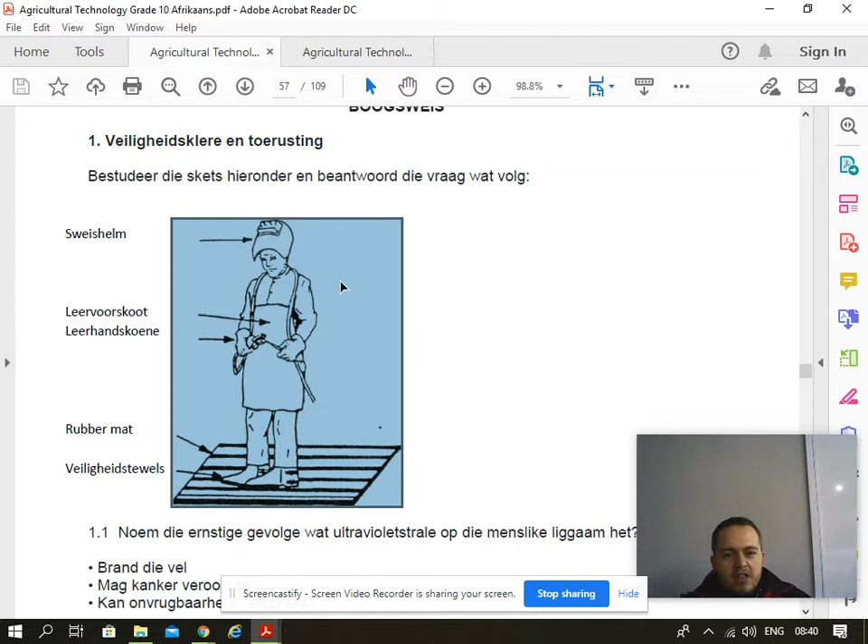It's leather stuff. Where did you buy that stuff? At Afrox. By Afrox, ja. In Stikland, you can also go and look. You can also look in Paarl if you want to go there. There's also one in Blackheath. Ja, jy kan daar gaan kyk ook.

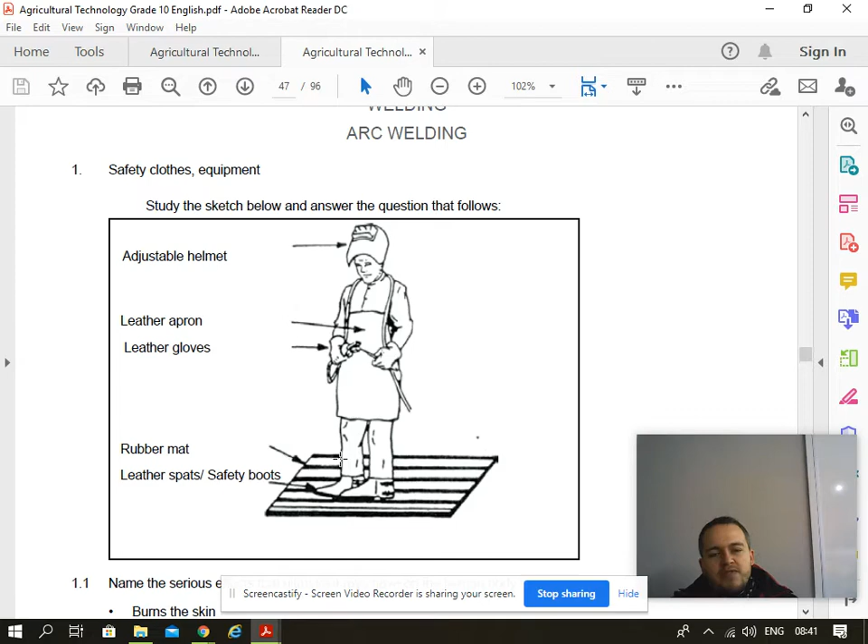So when we do a safety test or a safety exam, usually we ask you the sketch. We ask you what you wear. So you have to have an adjustable helmet, a leather apron, leather gloves, rubber mat, and leather spats or safety boots. Name the serious effects of ultraviolet rays to the human body: it can burn your skin, it might cause cancer, and it can cause sterility.

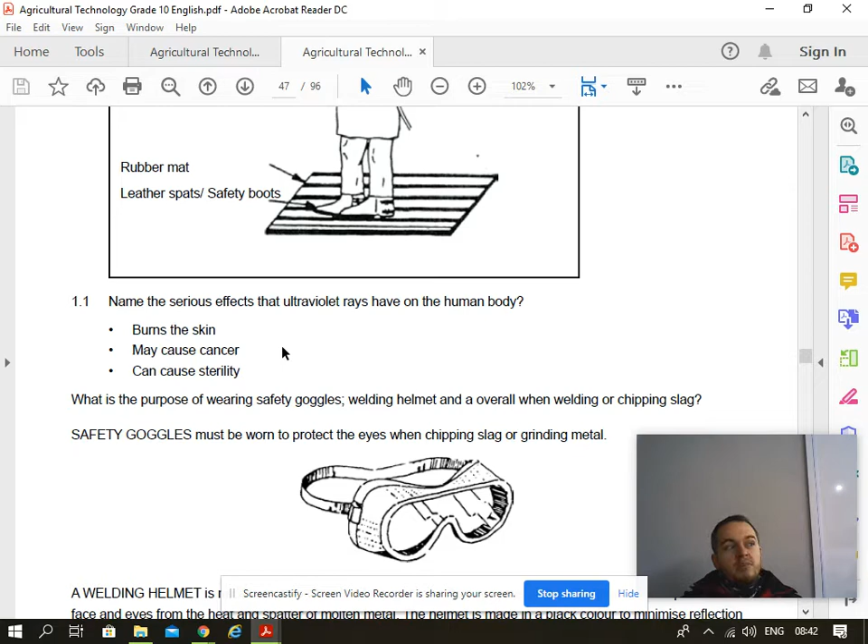That can burn you if you are constantly welding. So please don't go and tack and think you're gonna burn immediately, it doesn't work like that. If you are constantly welding for an hour, two hours, three hours, yes, then the burn will be bad. Does this include if somebody's welding next to you? Only if you're standing close to them, yeah, not if you're standing far enough. This is for direct contact.

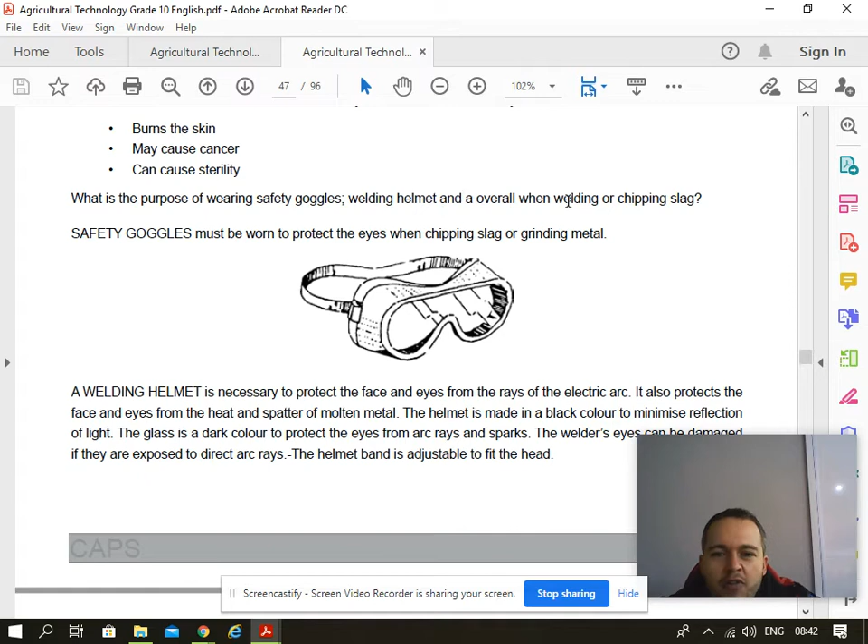What is the purpose of wearing safety goggles, welding helmets, and the overall while welding or chipping slag? Safety goggles must be worn to protect eyes when chipping slag or grinding metal. A welding helmet is necessary to protect the face and eyes from the rays of the electric arc. It also protects the face and eyes from the heat and spatter of molten metal. The helmet is made in a black color to minimize reflection of light.

The glass is a dark color to protect the eyes from the arc rays and sparks. The welder's eyes can be damaged if exposed to direct arc rays. The helmet band is adjustable to fit the head. A long-sleeved overall made of tough material must be worn to protect you from hot metal and sparks while welding. Safety precautions we're going to go to later.

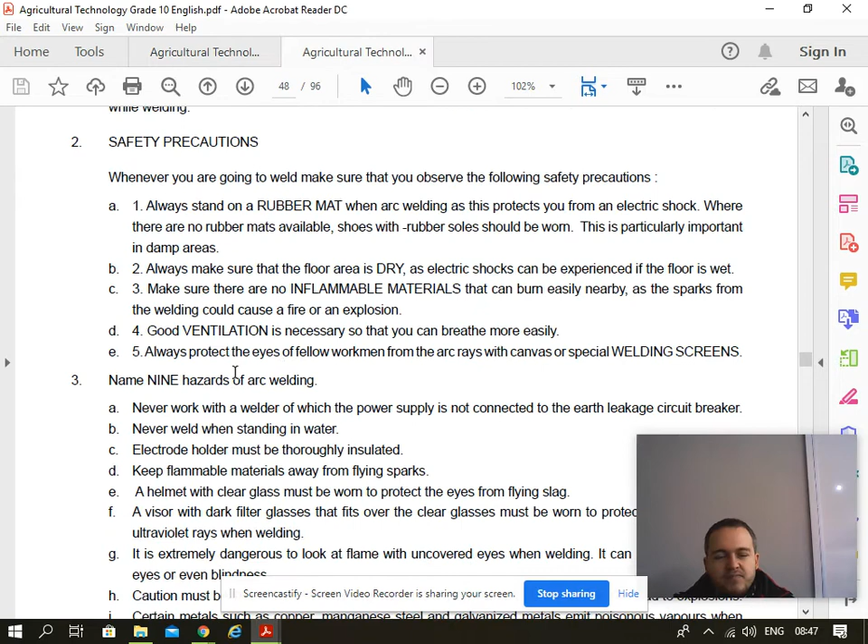Safety precautions. When we weld, we must look at the following. Always stand on a rubber mat when arc welding, or wear rubber-soled shoes. Always make sure that the floor is dry. Make sure that inflammable materials that can burn easily are not nearby. Good ventilation is necessary, and always protect the eyes of your fellow workmen when working with arc welders.

Name 9 hazards of arc welding. Never work with a welder of which the power supply is not connected to the earth leakage circuit breaker. Never weld when standing in water.

Electrode holder must be thoroughly insulated. Keep flammable materials away from flying sparks.

A helmet with clear glass must be worn to protect the eyes when chipping off slag. A visor with dark filter glass must be over the clear glasses to protect your eyes from arc eyes. It is extremely dangerous to look at a flame with uncovered eyes, thus causing arc eyes.

Caution must be taken when welding any drums. Explosive gases or substances can lead to explosions. Certain metals such as copper, manganese steel, and galvanized metals emit poisonous vapors when welded.

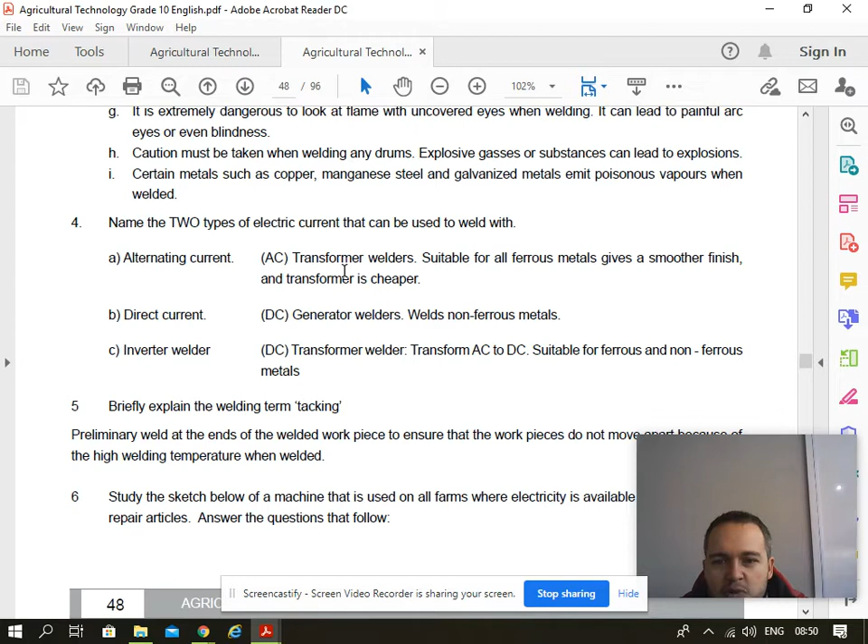Name two types of electric current that you use to weld: AC or alternating current. Transformer welder, suitable for ferrous metals, gives a smoother finish, and the transformer is cheaper.

You guys work with inverters. All of our welders in there are inverters. Does that include from DC to AC? Yes, so it's vice versa, it can go both ways. It transforms electricity in both ways.

Briefly explain the term tack welding. Tacking is a preliminary weld at the end of the workpiece to ensure that the workpiece does not move from high temperature welding. So a tack is when you put one at the top, at the bottom, or in the middle to make sure that when you're welding, the metal doesn't shift.

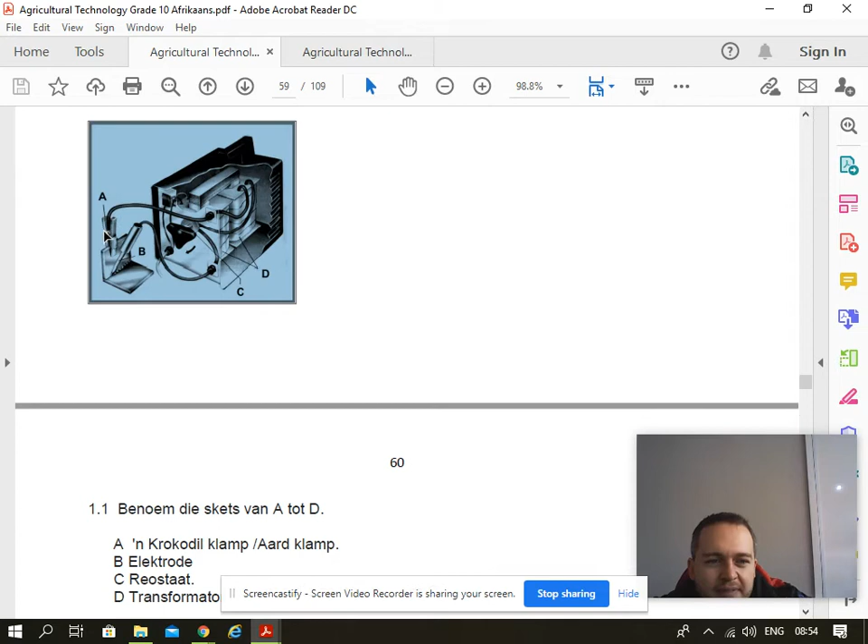For the English students, because there's no sketch - there's a sketch in your book, but it's on 2 different pages. Okay, so the sketch, let me open it for you guys quickly. That's your crocodile clamp. B is your electrode holder. C is your rheostat. And D is your transformer. So that's your rheostat and your transformer.

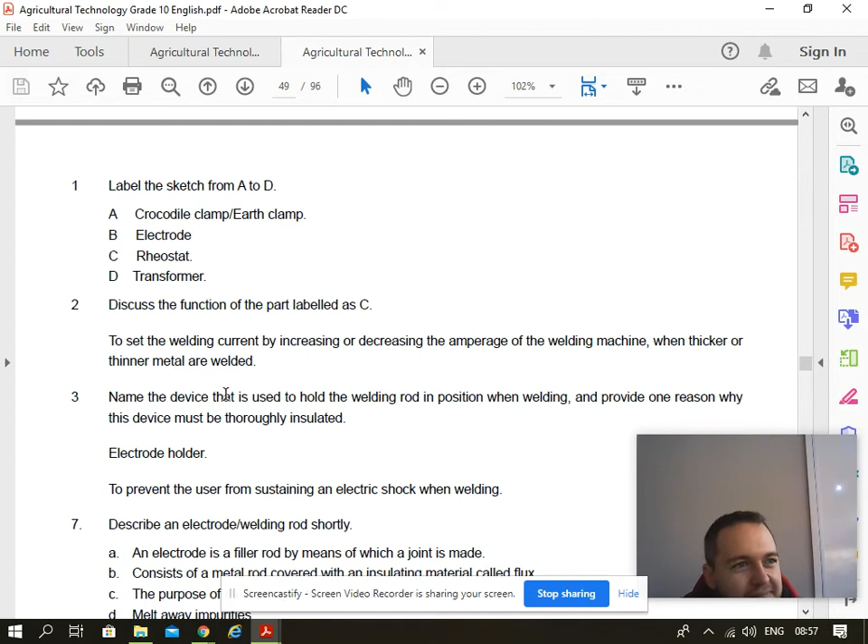Name the device that is used to hold the welding rod in position when welding. It is the electrode holder. Die apparaat wat die welding rod vashou is die electrode houer.

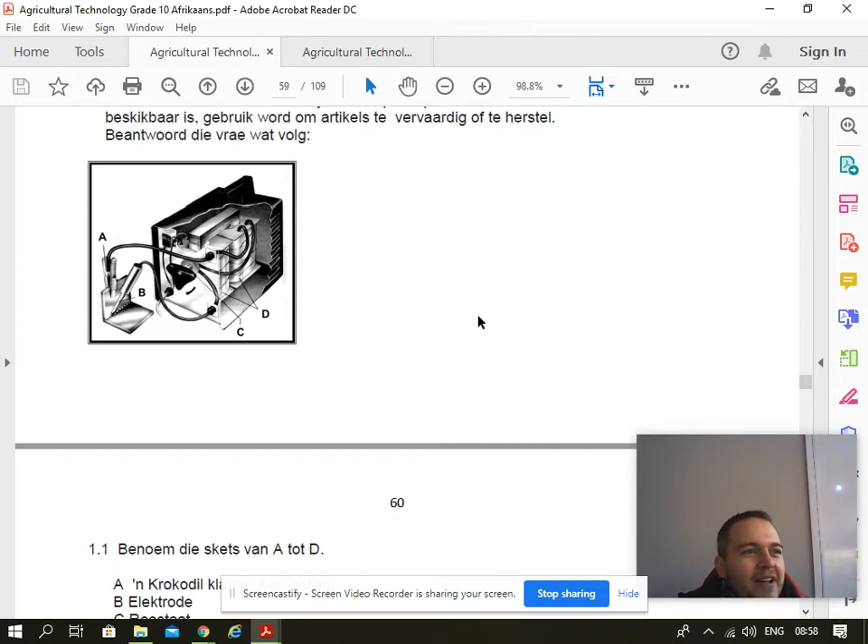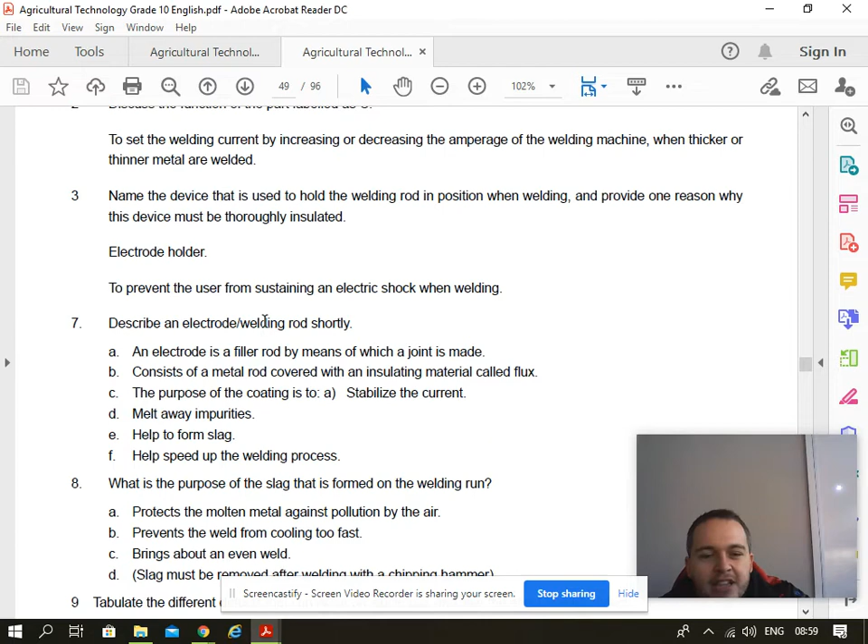In English: describe an electrode or welding rod shortly. An electrode is a filler rod by means of which the joint is made. Consists of a metal rod covered with insulating material called flux.

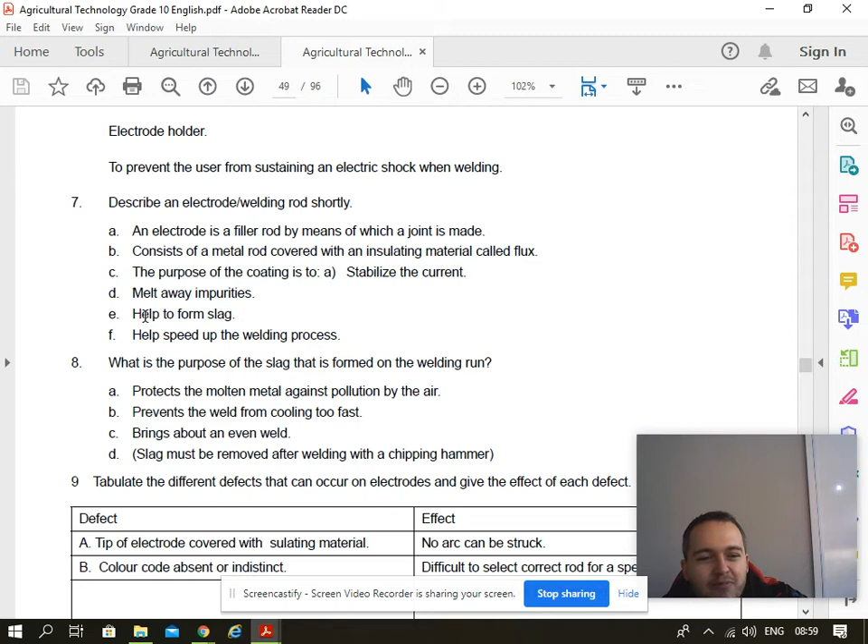The purpose of the coating is to: A, stabilize the current; B, melt away the impurities; help form slag; and help speed up the welding process.

What is the purpose of the slag that is formed on the welding run? It protects the molten metal against pollution from the air. It prevents the weld from cooling too fast. Guys, if your weld cools too fast, the metal won't combine, it's only heggy, it doesn't stick together, it cracks basically. It brings about an even weld, and slag must be removed after welding with a chipping hammer.

Some of you guys don't remove your slag. I've seen it, I've looked at your stuff. You forget to remove your slag, guys. That is minus marks - if I mark your piece, you lose marks on it.

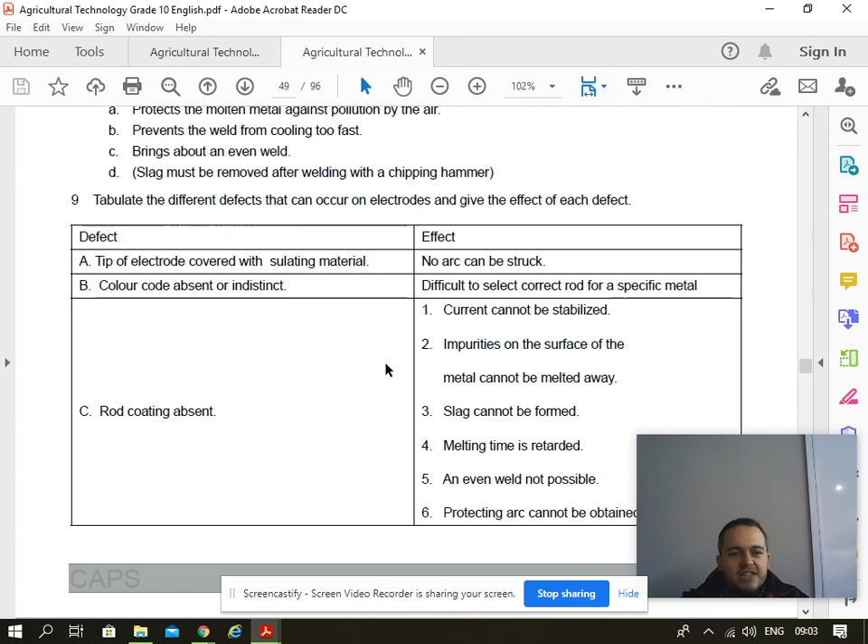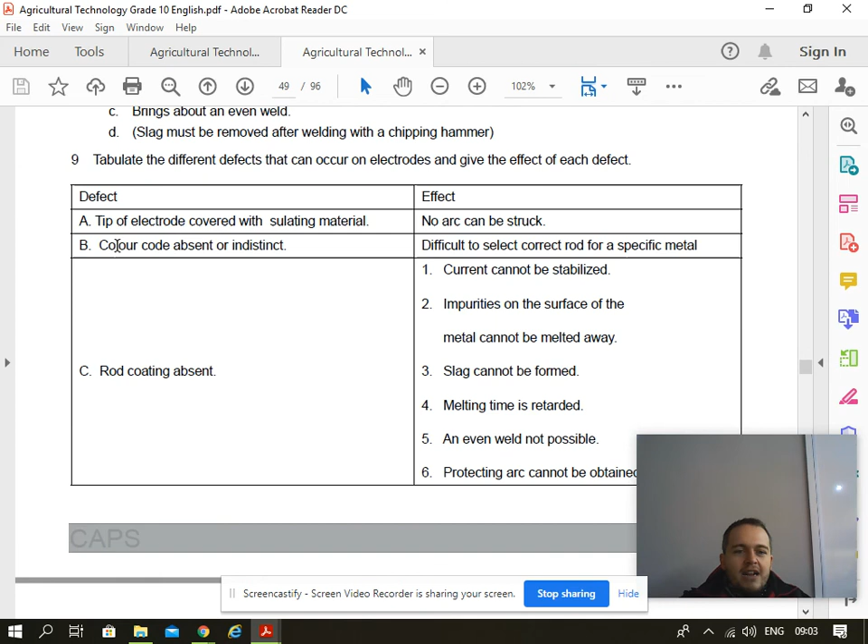Now for the English compatriots, our Anglo students: tip of the electrode covered with insulating material - no arc can be struck. Color code absent or indistinct - difficult to choose the correct rod for the specific metal. Remember, the yellow colored rods are for aluminium. Rod coating is absent - now 6 things can happen.

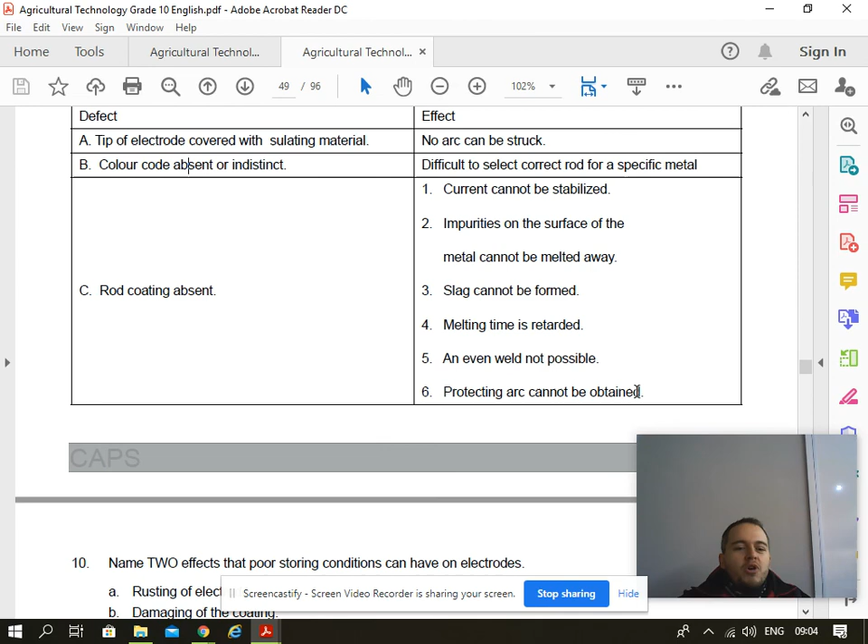You can name any one of these 6: current cannot be stabilized, impurities on the surface cannot be melted away, slag cannot be formed, melting time is retarded, an even weld is not possible, and protecting arc cannot be obtained. That is my story for the day.